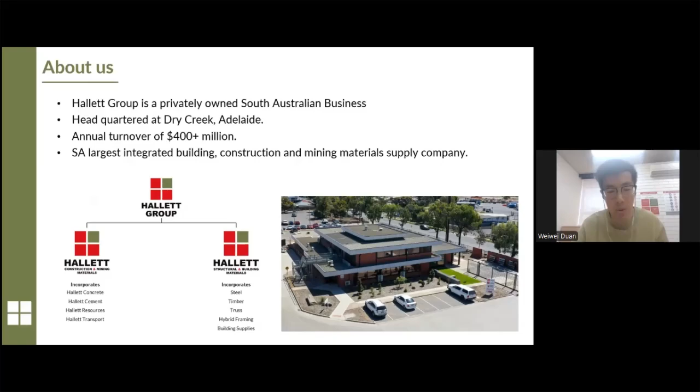To start with, let's have a brief look at SCMs, the supplementary cementitious materials. Hossein has already introduced SCMs, which are used to partially replace Portland cement to improve durability, workability, and mechanical performance, while at the same time significantly reducing the carbon footprint of construction, especially cement production. As we all know, cement production contributes to more than 12% of the total CO2 released every year.

Depending on the chemical composition and reaction mechanisms, SCMs can be divided into two categories. The first is what we call pozzolanic SCMs, the typical one being low calcium fly ash. In Australia, we already have a standard to regulate this type of SCM. The other type is latent hydraulic SCMs, the most popular one being GGBFS. Again, we currently have an Australian standard to regulate this type of SCM.

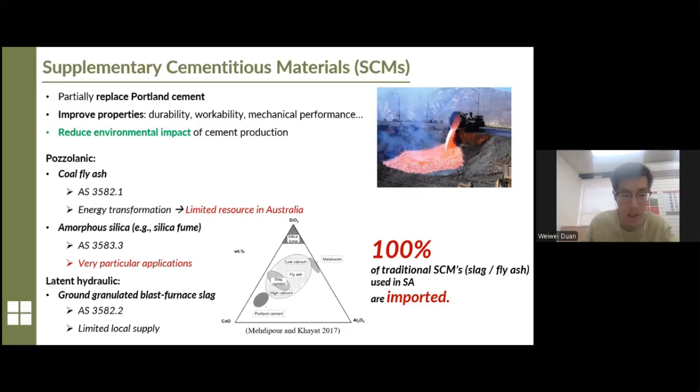A key issue we're facing is that Australia is facing a critical SCM shortage, especially in South Australia, where we are 100% reliant — all of the typical SCMs, the fly ash and slags, are currently imported. What also makes the demand for SCMs even higher is our net zero CO2 target by the year 2050. To achieve that target, our concrete demand is increasing, but we need to decrease CO2 release, so the result is we have to use more SCMs to achieve that goal. The estimation is that 33% more SCMs will be needed by the year 2050.

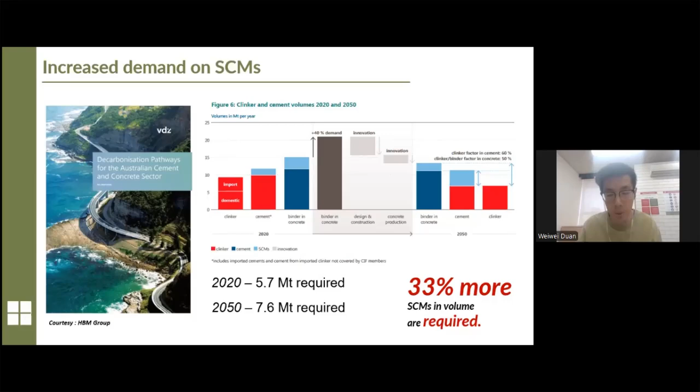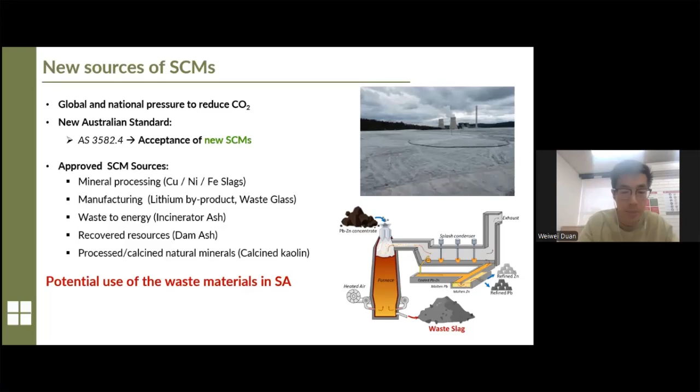Under that global and national pressure to reduce CO2, a new standard has been released, AS 3582.4, to allow use of manufactured SCMs. This includes new SCMs from mineral processing waste, incineration waste, and recovered resources. This new regulation and standard creates both a challenge and an opportunity for us. Hallett Group has embraced the opportunity by identifying and developing new SCM sources in South Australia.

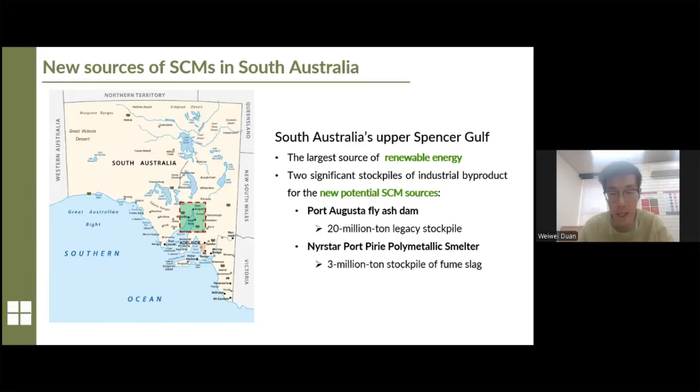That is where we are looking and focusing. South Australia's upper Spencer Gulf is home to vast industrial byproduct stockpiles. We currently have two focuses: one is the Port Augusta fly ash dam with a stockpile of 20 million tons, and the other is the Nyrstar Port Pirie polymetallic smelter with 3 million tons of fume slag. In addition to these two stockpiles, this area also has the largest source of renewable energy, which we may use in future development.

To get use of these resources, we are planning to invest 130 million AU dollars in decarbonization activities that include securing long-term material rights, which is already complete, and launching a research and development program, which has already started for 2 years. And also we will be building infrastructure.

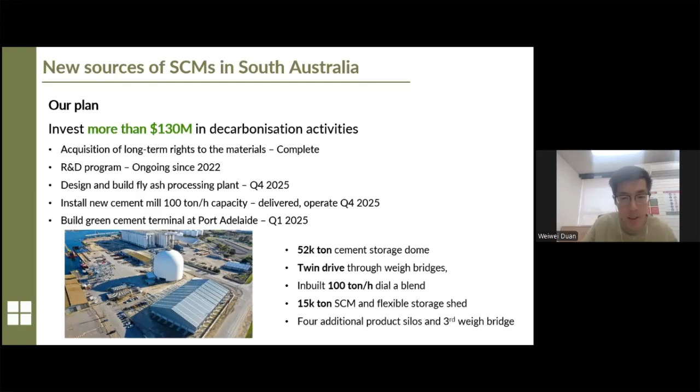Such as a fly ash processing plant and state-of-art green cement distribution hub. This photo shows it has the capacity of 52,000 ton cement storage, and has two drive-through weigh bridges, 100 tons per hour blend, and 15,000 tons SCM and flexible storage, with four additional product silos and a third weigh bridge.

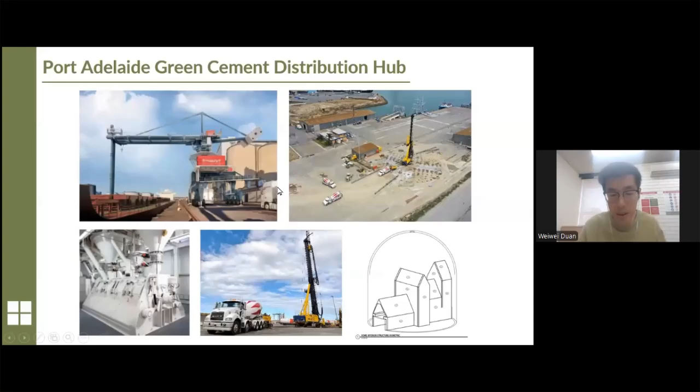That's some other pictures of the dome, I think it's almost finished at the Port Adelaide.

Based on that, we started our R&D program that currently has two folds. The first stage is to understand the fly ash characters, especially the distribution along the spatial dimension. We have to achieve this.

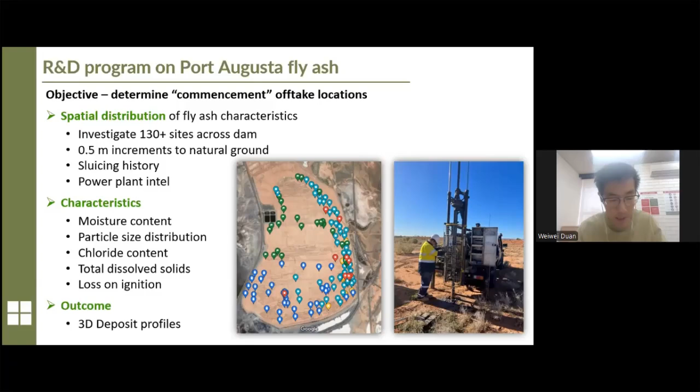The characters we are looking for include moisture at site, moisture content, particle size, chloride content, TDS, and loss on ignition. So these studies have provided us a detailed 3D profile, we'll see it later, and helped us identify the best place to offtake the fly ash.

That is a photo of the fly ash taken from different depths. You can see that one is finer and that one's a little bit coarser. If you can see the particles here, that one is definitely different from those two, it contains more moisture. Maybe it's close to the water table, or maybe the water flow has a higher chance to flow in that area, causing a difference at different depths.

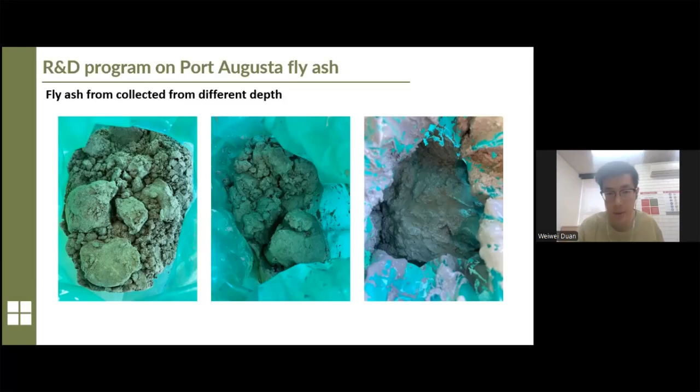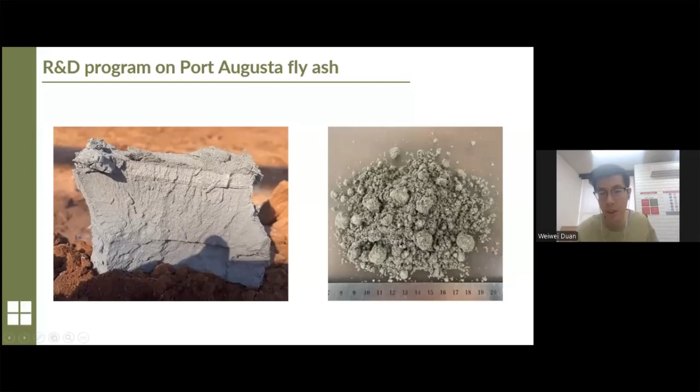That's also a photo of the fly ash taken from the ground, and we can see the top one is the coarse particles, and there's a compacted layer with finer fly ash or something, and that is the median particle size of the fly ash. That's the photo of the fly ash we took back to the lab. We put all these samples in the truck, then travel it back to the lab. That is what it looks like.

That is the 3D profile we investigated on the specs of chloride, loss on ignition, and fineness, and this one is moisture. If we first look at the moisture, we found that the north side usually has higher moisture. This is because, remember, the fly ash is pumped from the south side, then flows to that side, causing high moisture at the north side.

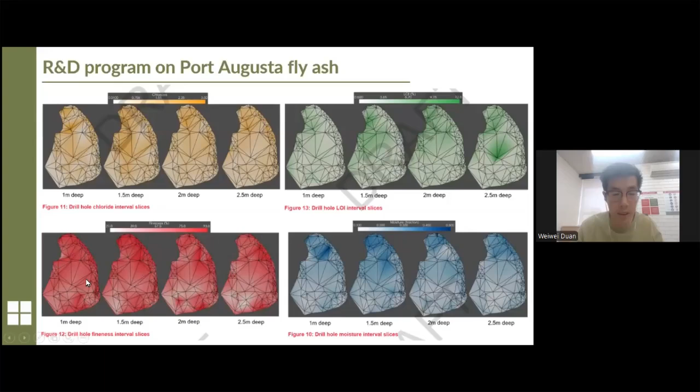Because the chloride is dissolved in the moisture, if we look at the chloride map, we find that on the north side we have relatively slightly higher chloride content than this side. And fineness is more related to the depth of the sample-taking point, because the fine particles are easy to flow and the coarse particles are likely to settle instead.

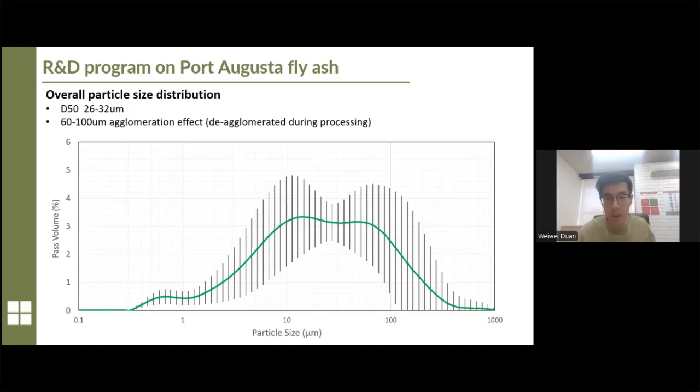That is the particle size, overall particle size distribution of all 130 samples we have taken. The D50, the average size, is between 26 to 32 micrometers, which is really fine. There's also an agglomeration effect around 60 to 100 micrometers, which requires further processing to get it de-agglomerated.

So that's the first stage, trying to understand the fly ash characteristics. Followed by that, we have another stage, to develop and optimize the fly ash processing methods. The process methods we currently include are washing, dehydration, drying, de-agglomeration, and classification.

To start with, we built a pilot plant at 1 to 10 scale at Dry Creek to refine the technologies for chloride removal and also washing and milling of the coarse fly ash.

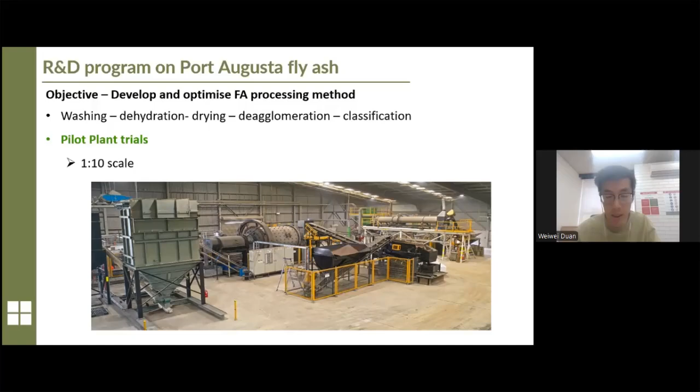So what that one gonna do is we provided the vacuum at this pipe, and they will suck the water, and the fly ash will be blocked at the disc. Then we scratch the disc to get the dehydrated fly ash.

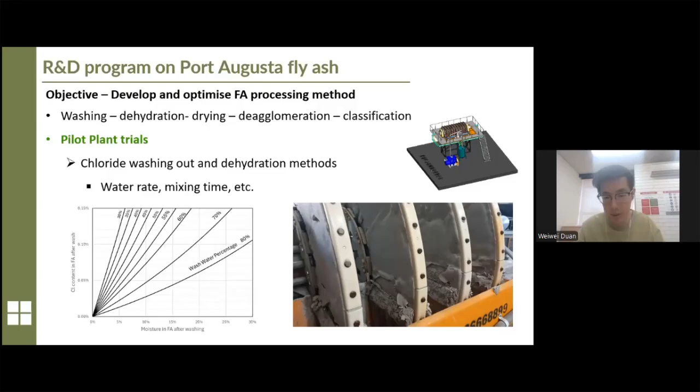We're also looking at the water ratio and different operation parameters, including the water rate, how much water we use to wash out the fly ash, and how long we should wash it. We also try to get some relationship between the chloride content left in the washed fly ash versus all these parameters. So that's the result we are trying to get.

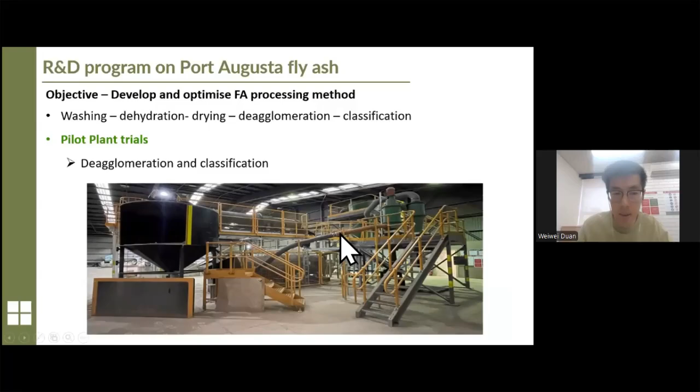And that's the photo of the de-agglomeration and classification equipment in the pilot plant. In addition to the equipment we currently use, we're also looking at other chloride washing techniques and dehydration techniques.

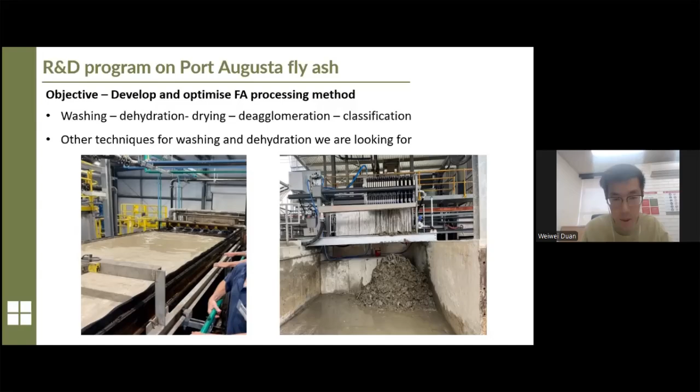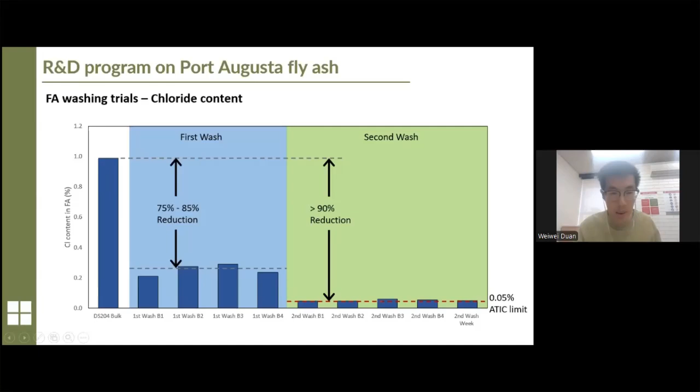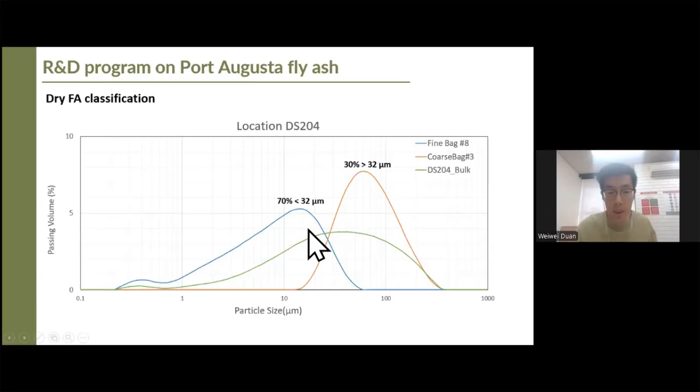That is the result of the classification. So when we wash the fly ash, we try to separate the coarse and fine particles. About 70% of the fly ash is very fine, lower than 32 micrometers in particle size, and the remaining is greater than 32 micrometers.

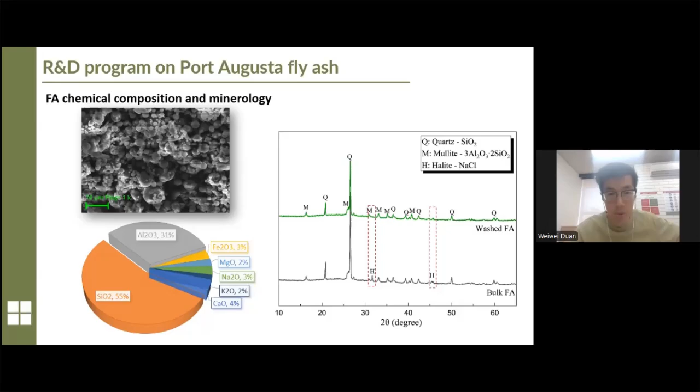So all this testing indicates that the processed fly ash could be suitable to use as SCM in concrete. To prove that, we put it into making 40 megapascal concrete trials.

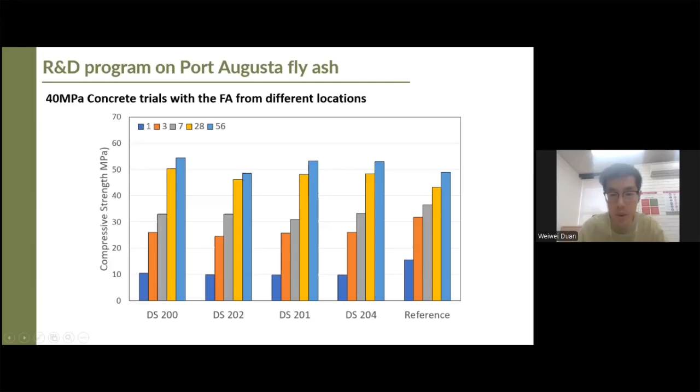That is the result of the fly ash from different locations. You can see that although the early strength doesn't increase as fast - because fly ash is a pozzolanic material, and all pozzolanic materials have slower strength development at early stage - after 28 days, we could see that the strength is similar or even higher than the reference samples, which only contain cement as the binder.

We also investigated different classification parameters so that we obtain different particle sizes of the fly ash. We could see that this still has comparable strength to the reference samples, and some samples - the finer ones with finer PSDs - even have slightly higher strength than the reference sample.

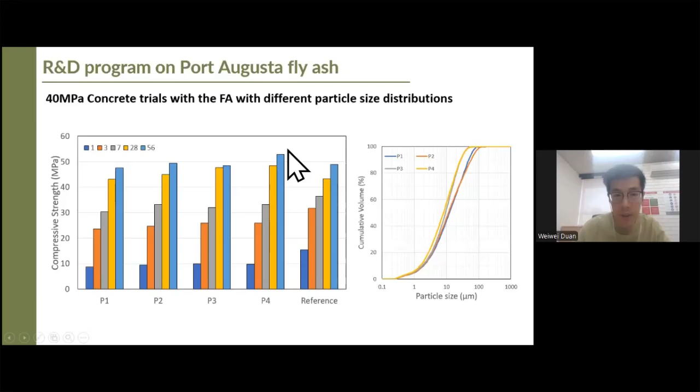So by harvesting the fly ash, we have already gotten some environmental benefits, such as reducing land use and minimizing CO2 release. But we believe we could still further maximize the environmental benefits. So what do we do to reach a target of zero waste?

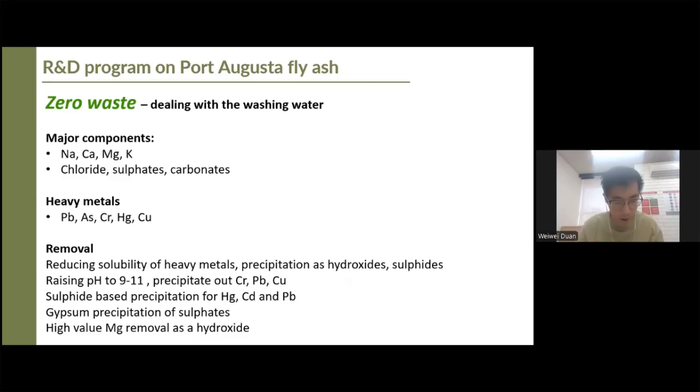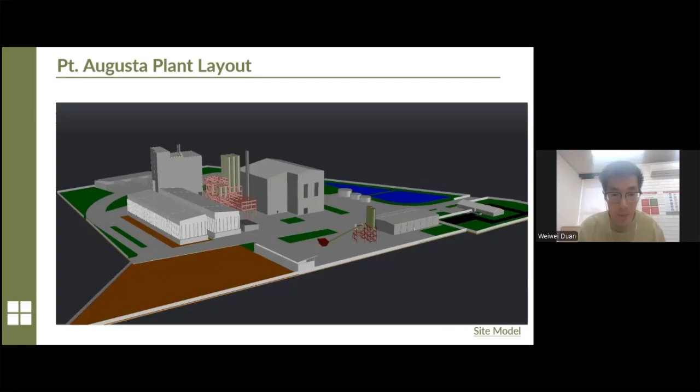That is to reuse the washing water, with precipitation of heavy metals to ensure there's nothing left in the recycled water. That is the model - the schematic and illustration of the pilot plant. Not the pilot plant - that's the real plant we would like to build at Port Augusta.

To sum up, this project gave us an idea on how innovation and sustainability can transform industrial waste - the Port Augusta fly ash - into valuable resources.

But I believe there are some challenges, such as the management of the stockpile, scaling up processes like washing and dehydration efficiency, and also regulatory frameworks such as chloride limits, which may need to adapt for new SCM resources.

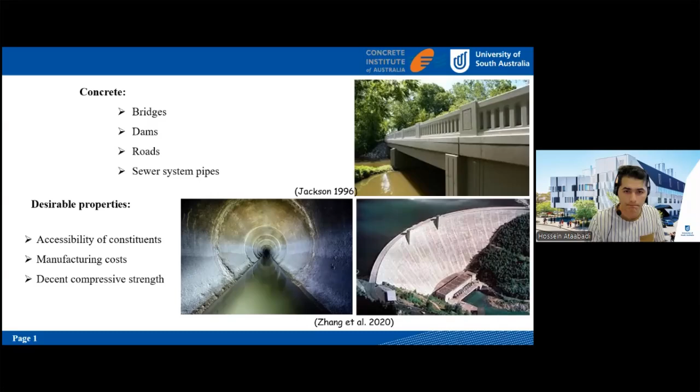However, concrete has a brittle nature, so it's prone to cracking. Once a crack happens, it usually allows aggressive ions to penetrate inside the concrete structure. Because the chemical resistance of concrete is low, these penetrated aggressive substances or ions can cause corrosion, chemical expansion, and even shrinkage of the concrete material.

Another important problem, which mostly happens in sewer system pipes, is microbiologically induced corrosion, or MIC, which mostly happens in this environment because of activation of microorganisms. In this environment, hydrogen sulfide from the sewer is transformed to sulfuric acid, which reacts with the concrete structure and causes corrosion, changing the concrete material to a very soft material.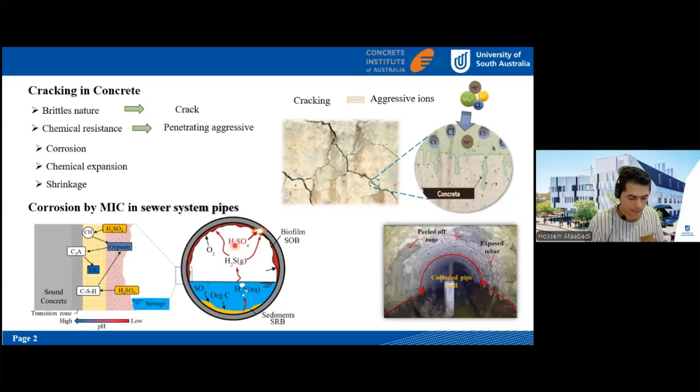In order to mitigate MIC in this environment, a lot of research has been done over the last decades, but among all of them, one of the effective methods is to improve the mix design of the structure and concrete used in this environment. Different methods like addition of chemical surface coating, or even controlling the hydrogen sulfide gas levels in the system have been done, but all of this concluded in improving the mix design.

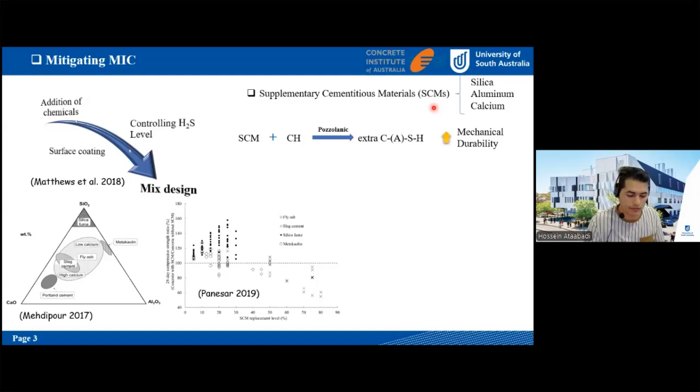So for improving the mix design, different sorts of supplementary cementitious materials, or SCMs, have been included in the mix design of the concrete. As you know, SCMs have a lot of silica, aluminum, and calcium in the matrix, so they can react with the hydration products of the cementitious material and produce extra gel, or calcium aluminum silicate hydrate gels, that can improve the mechanical and durability properties of the plain concrete as well.

But over the last years, because of changing supply and demand of SCMs, the amount of SCM available for use is getting lower and lower. So one of the approaches that both industry and academia are looking for is to find an alternative source of SCMs.

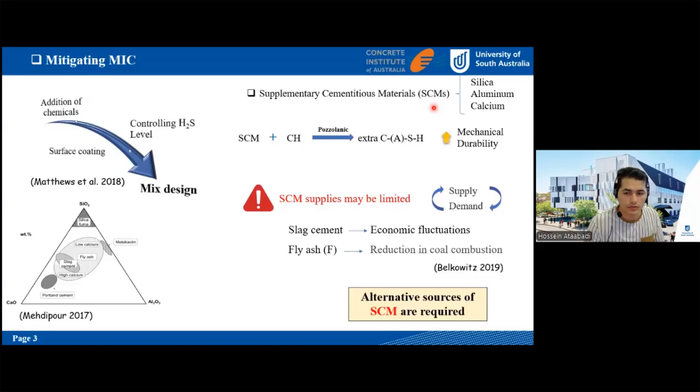In this regard, drinking water treatment sludge is one of the materials produced during water treatment processes. Based on increasing water demand in both industry and domestic use, and population growth, the amount of aluminum sludge has increased. Because there is no very specific disposal method, most of the sludge is disposed to landfill, which causes a lot of costs. To give you an example, annual production of sludge in a mid-scale drinking water plant is 2,000 tons per year. Just imagine if we have 400 drinking water plants in Australia itself - that shows how much sludge is produced annually, and based on estimations, its amount is increasing everywhere.

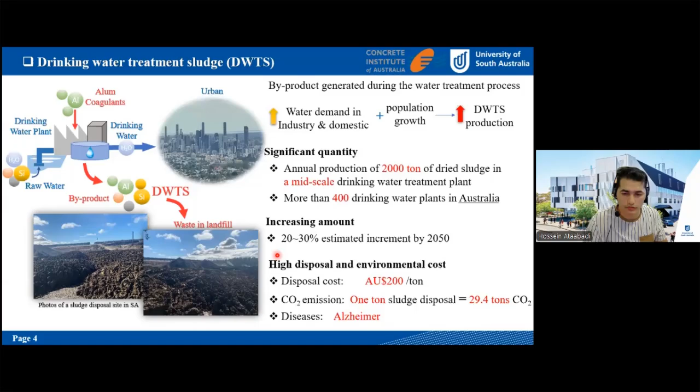Sludge, because it has a lot of aluminum inside its matrix, can cause some side effects - environmental effects, like CO2 emission. So it increases CO2, and leaching of aluminum to the groundwater could cause other sources of disease, such as Alzheimer's.

So one of the applicable methods of reducing the impact of sludge is to use it as an SCM in cementitious material. This is the work my group has done over the last 5 years, and we've had a lot of achievements. Once we incorporate the sludge into the cementitious material, because of its aluminum and silicon content, it changes the aluminum-silica ratios inside the cement matrix, and it can improve water penetration resistance and improve the corrosion resistance of the cementitious matrix. So definitely it improves the structure of the cementitious material.

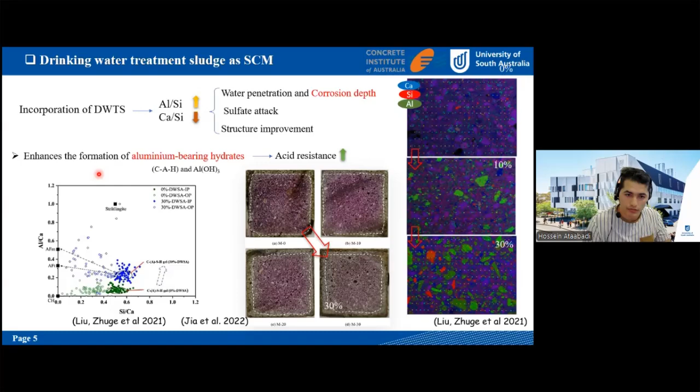This happens once the aluminum-bearing phases that the sludge has can react with the cement hydration, increasing some calcium aluminum hydrates and producing extra hydration products. So it can improve the corrosion resistance of the material.

The raw sludge has a lot of organic material, around 29%. So before using the sludge in cementitious material, it needs some sort of pre-treatment, which could be crushing, calcining, or milling. After pre-treatment, the organic content is reduced to 6%, and the amount of aluminum and silicon increases very sharply, so it can be used in the cement material.

Actually, sludge can be used as a cement replacement, sand replacement, and even as a precursor for alkali-activated materials. So inclusion of sludge can have economical solutions: it reduces the sludge disposed to landfill, and can improve the service life of the resulting products.

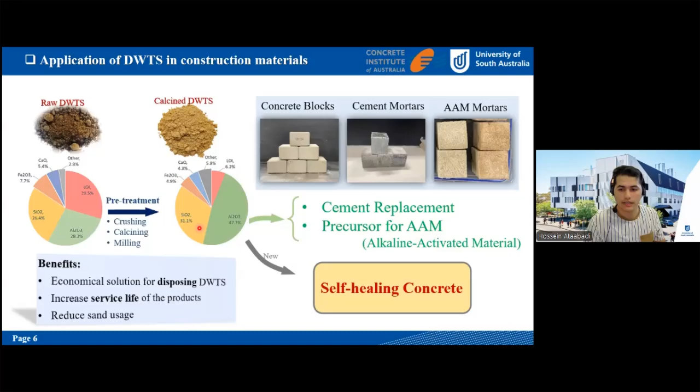In our new technology, we are going to use sludge as a healing agent in concrete, which is part of my project. As you know, self-healing concrete refers to material that can heal itself without any intervention.

Concrete has a very intrinsic healing performance, which we usually call autogenous healing. That happens because of further hydration of unhydrated cement inside the matrix, and it can be improved by addition of some mineral admixture, fibers, nanofillers, or curing agents.

This autogenous process mostly happens at pH above 7.5, so we need an alkaline environment for this healing performance to happen. The most important thing is that it's very limited to cracks less than 150 micrometers.

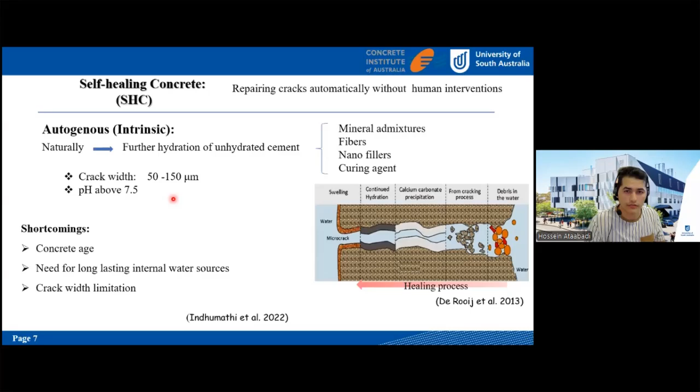This shortcoming is that autogenous self-healing mostly depends on the concrete age, so it needs a longer time, and it needs an internal water resource so that unhydrated cement particles can react and produce some gels.

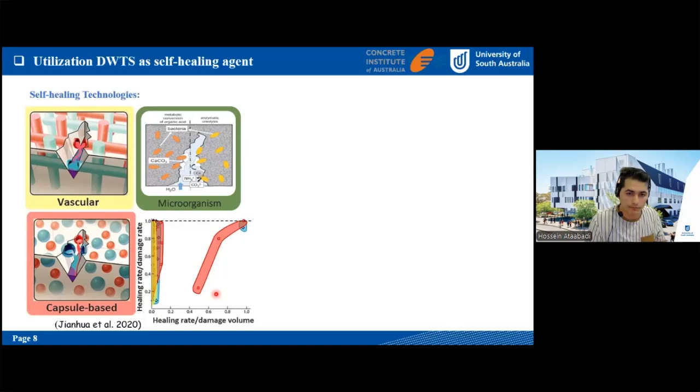On the other hand, there are different technologies using supplementary materials added to the concrete structure to improve its self-healing performance, such as vascular systems, using microorganisms like bacteria, and another method using capsule-based systems. Among all these technologies, the capsule-based self-healing material shows the higher rate of efficiency compared to the other techniques.

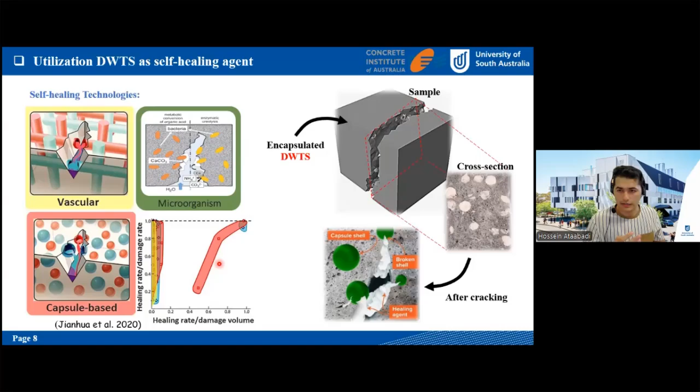So in this regard, my project is going to encapsulate the sludge as a kind of capsule and include it into the cement material. My project consists of 3 steps: the first step is the production of the capsules and checking their properties, morphology, and related tests.

After that, we will include the capsules into the cement mortar to see how it affects the mechanical properties, and then we will look at the self-healing efficiency of the capsule in the mortar samples.

For the production of capsules, as I mentioned before, we need a kind of pre-treatment. The raw sludge goes under grinding and calcination, and again further grinding to find the final calcined sludge. In this process, we not only reduce the particle size to around 8 microns, but also activate the sludge's pozzolanic reactions through calcination.

Once we produce the sludge, we mix it with calcium hydroxide and some other substances. The main core would be just sludge and calcium hydroxide, but we can add other materials to improve the reactivity, like superabsorbent polymers or expansive materials. We include all of this material together, then use a phase change material called polyethylene glycol, or PEG.

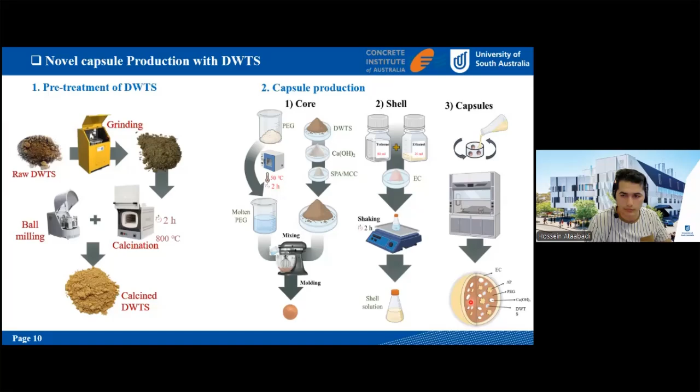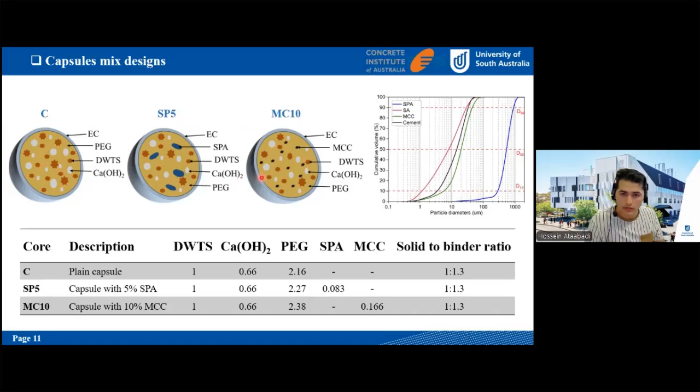In my project, I produced one plain capsule, which I call C—it's just the aluminum sludge and calcium hydroxide. I also had two other capsules: one incorporating superabsorbent polymers, and another with a cellulose-based expansive material. So in total, I have 3 capsules that are going to be added to the cement material.

Here you can see some morphology of the capsules. The capsule produced is in a very spherical shape, and you can see a very thin layer of the shell material all around the core material that covers the whole surface.

And here is once we did some testing on the capsule. So after mixing, you can see some sand material attached to the capsule, and here is one broken capsule. So even after breakage, the capsule retains its shape and it's not degraded too much.

Here is just the X-ray simulation. So we simulate the shell material and the core, so we could see if the core sample is totally covered, and it's proven that the shell material we selected can cover the whole core very well.

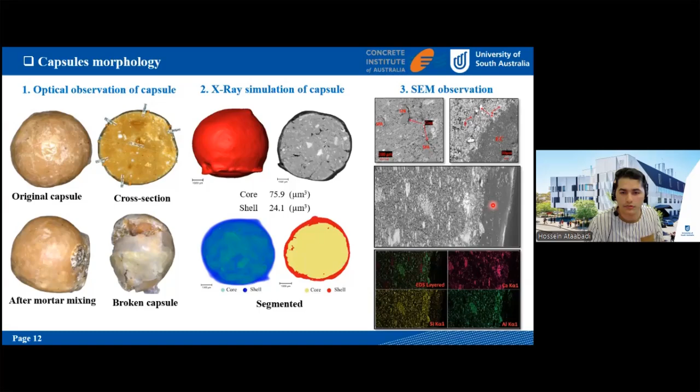We also did some SEM analysis. If you see here on the right side, this area is the shell material, very smooth shell. It's showing that the structure is really dense, so it can prevent water penetration inside the capsules during the mixing and preparation of cementitious material.

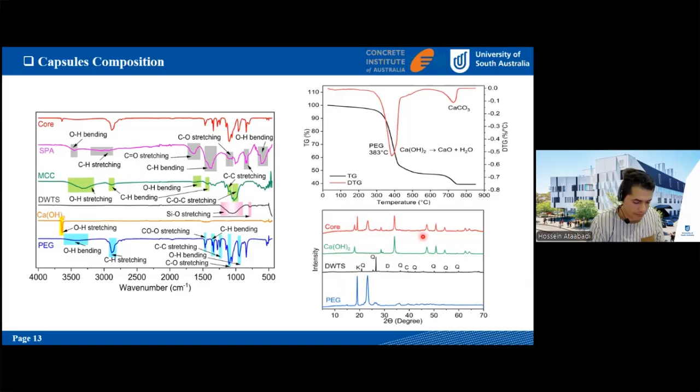Okay, so after production of the capsule, it's going to be used in the cement mortar samples. We added the capsule in different ratios. Here I'm just presenting one of the ratios we have. We added 4% of the capsule, replacing the sand, in the mortar samples.

We see that the compression and flexure strengths both reduce around 20%. The compression actually reduced around 30%, and the flexure reduced around 18 to 20%. This decrease is because the capsule's interaction with the cementitious material is not that strong, because the ethyl cellulose we are using is a kind of hydrophobic material, so the bond between cementitious material and the capsule is not that strong.

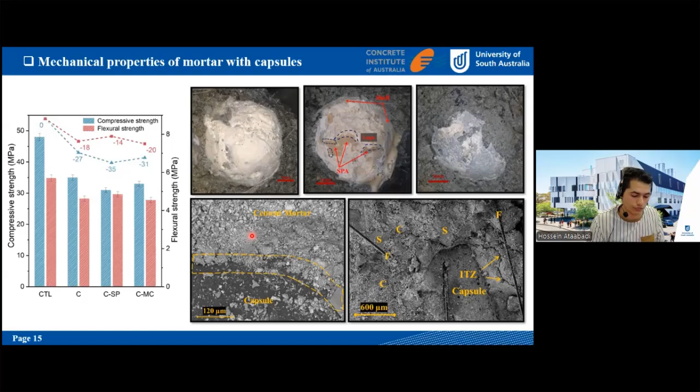And also another impact could be the strength of the granules itself is less than the sand and coarse aggregates, so it reduces the overall strength to some extent.

So in terms of the self-healing efficiency, we had three to four types of tests. We test the mechanical strength to see how it recovers. We crack the samples with this test, generating cracks in both cubic and beam samples, and then put them for healing time in different periods to see how much strength will be recovered after the healing times. Another test we've done is to see what's the maximum crack that can be closed by the capsule.

So we generate some samples and create some artificial cracks with different widths up to 1 millimeter, to see how much of this crack can be healed through the samples.

Also, after the cubic samples production, we put a rebar on top to create a single crack, and then measure and put some water on top of that and put the sample for healing. After different times, we measure how much water penetrates through the sample, showing how much the healing products generated can prevent water ingress inside the samples.

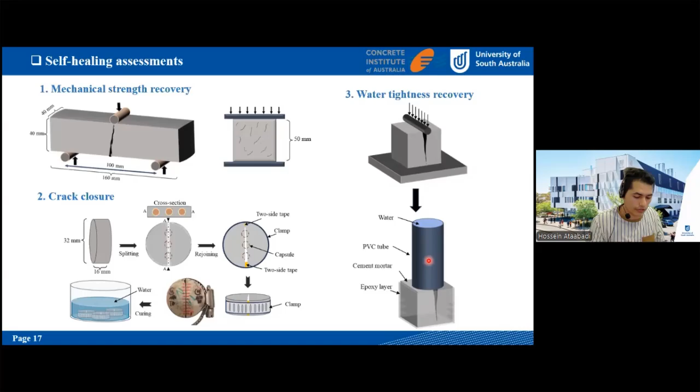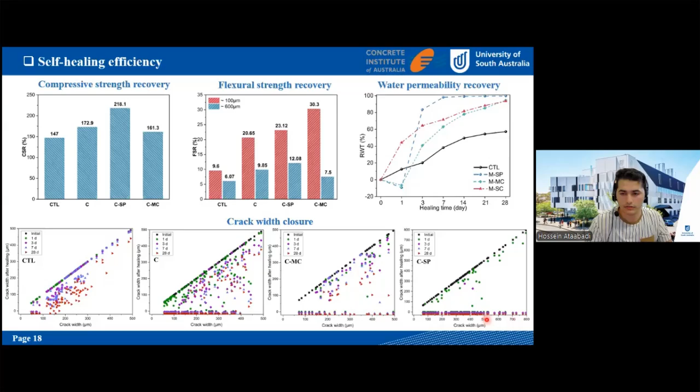And addition of two other supplementary materials to the capsule core increases its closure rate. In the samples, we had super absorbent polymers, and the void that could be healed was around 800 micrometers. So it can actually heal very large cracks.

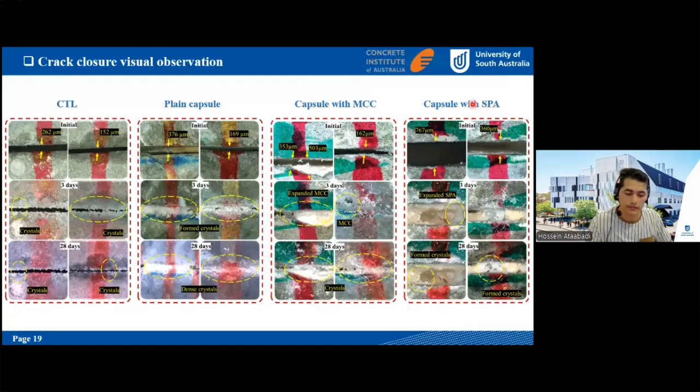Even the larger cracks can be healed with a combination of super absorbent polymer and the healing agent we have.

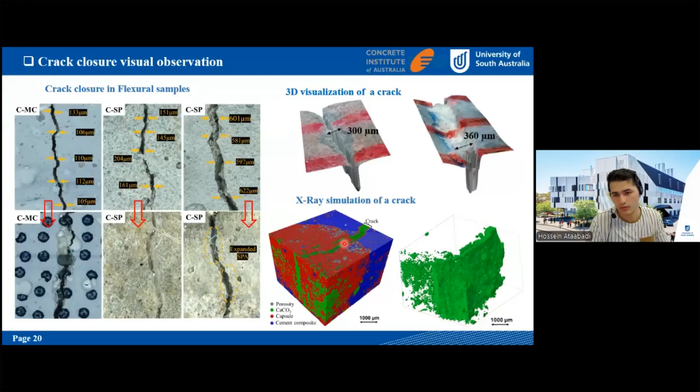Here is some other visual aspects, like 3D observation of the cracks, and here is the X-ray simulation. From here we could find the healing product from the capsules. The red one is the capsule and the blue is the cement matrix. The healing product from the capsules starts to generate from inside the capsule, then goes outside and fills this crack here.

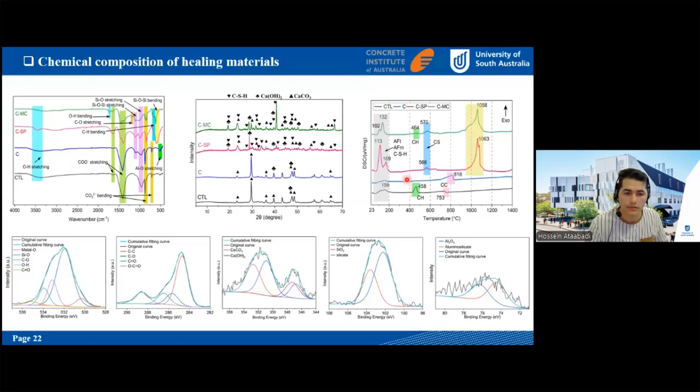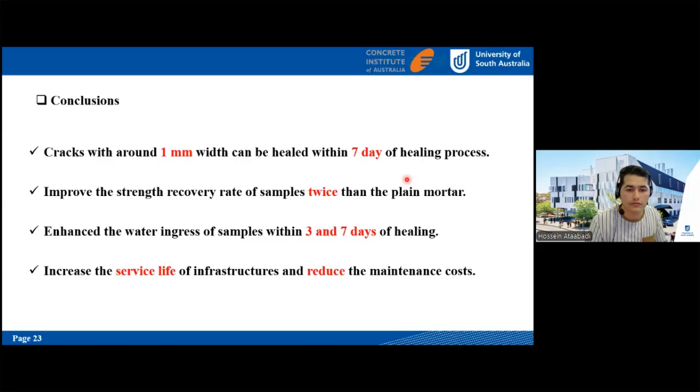In conclusion, through the whole tests, we found that cracks around 1 millimeter, 800 micron, can be filled within 7 days, showing a very fast response. It improved the recovery rates, strength recovery and water recovery more than the control one. This will definitely increase the service life of the structure.